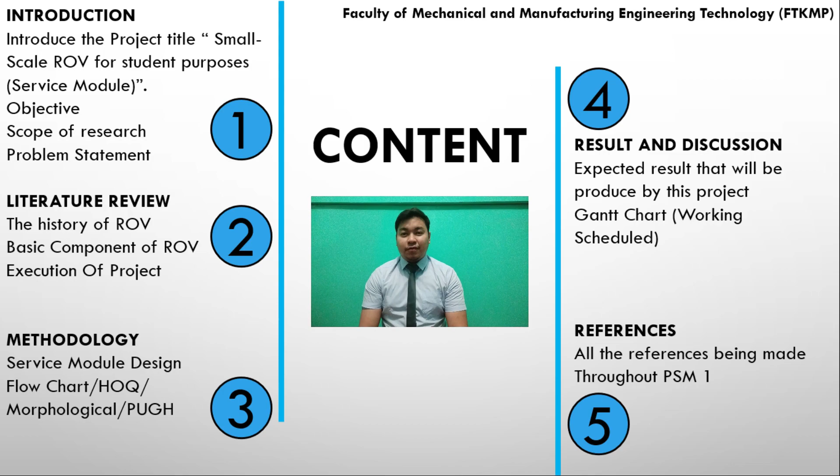For the introductions, ROV has been used and has increased in use following its usefulness in getting jobs done. Many of the vehicles are used for underwater activities in many different companies such as oil and gas, installation, structure, pipeline, and surveillance of the underwater surroundings. Remotely operated vehicles are known as ROV, which are operated by a crew either aboard a floating vessel or on proximate land. These vehicles are used for research observation of underwater activities.

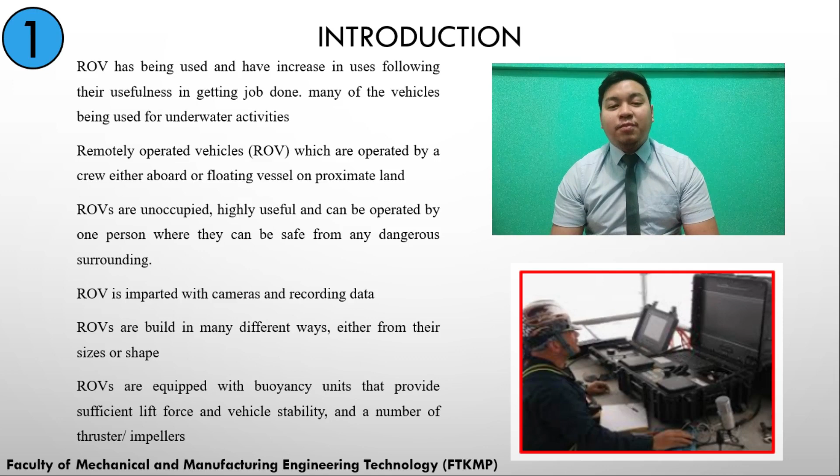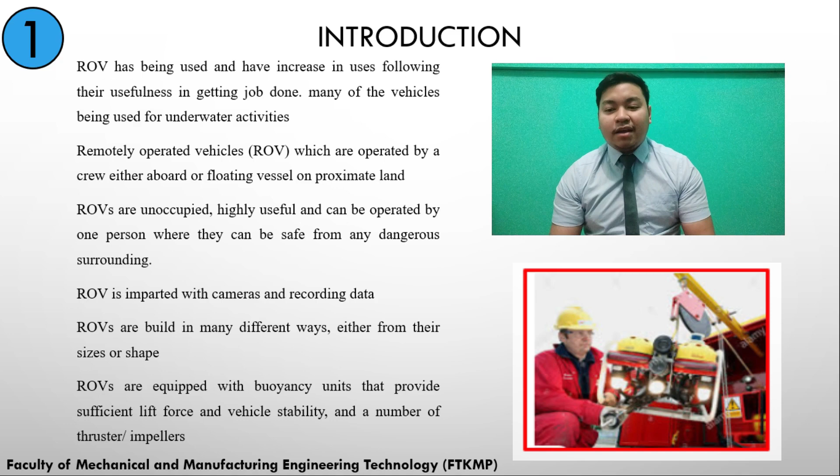ROVs are unoccupied, highly useful, and can be operated by one person, where they can be safe from any dangerous surroundings. ROV is imparted with cameras and recording data. ROVs are built in many different ways, either in size or shape. Their main feature is still to act as a monitoring device to help humans better understand aquatic life. ROVs are equipped with buoyancy units that provide sufficient lift force and vehicle stability, and a number of thrusters or impellers provide manipulation of movement of the whole unit.

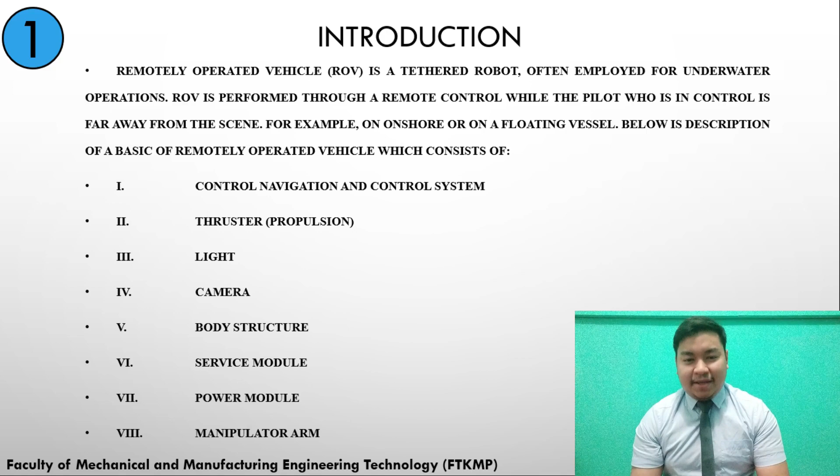Introductions. Remotely operated vehicle, ROV, is a tethered robot often employed for underwater operation. ROV is operated through a remote control while the pilot in control is far away from the scene, for example, onshore or on floating vessels. Below is the description of our basic remotely operated vehicle, which consists of control, navigation and control system, thruster, light, camera, body structure, service module, power module, and manipulator arm.

So the objective of this project is to design and develop a small-scale ROV for educational purposes. Number 2 is to fabricate a watertight body structure for the ROV to store electronic components. Number 3 is to test the small-scale ROV creation.

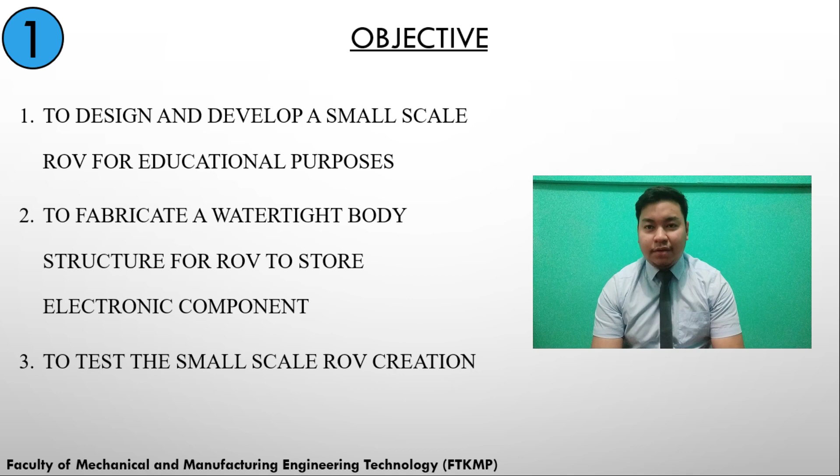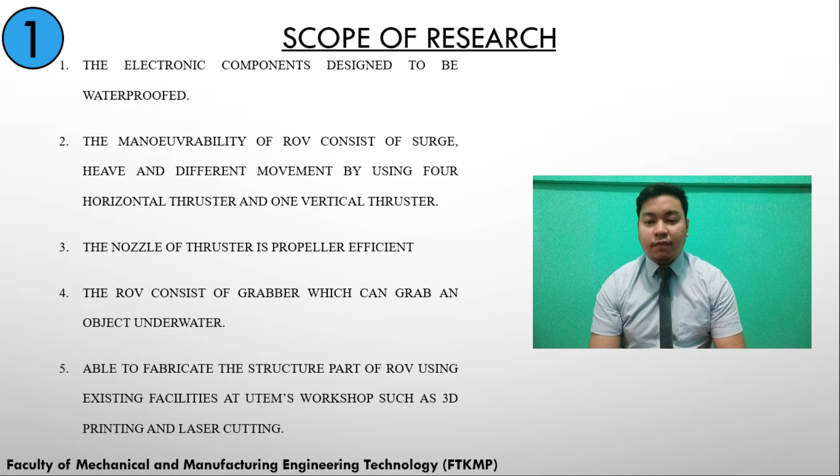Now for the scope of research, the electronic components are designed to be waterproof. The maneuverability of the ROV consists of surge, heave, and different movements by using 4 horizontal thrusters and 1 vertical thruster. Number 3 is the nozzle of the thruster is propeller efficient. Number 4 is it consists of a grabber, which can grab an object underwater. Number 5 is being able to fabricate the structure part of the ROV using existing facilities at UTeM workshops such as 3D printing and laser cutting.

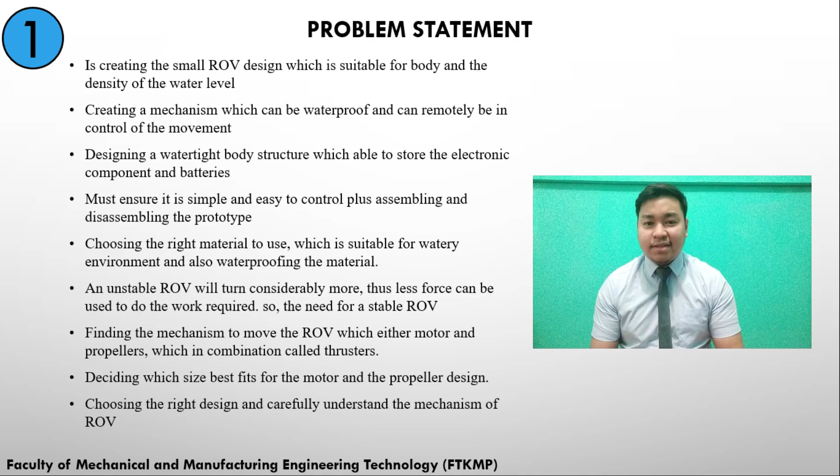Finding the mechanism to move the ROV, either motor or propellers, which in combination are called a thruster, deciding which size best fits for the motor and the propeller design, and choosing the right design and carefully understanding the mechanism of the ROV. For the literature review, the history: the first full ROV was made by Dimitri Rebikoff in 1953.

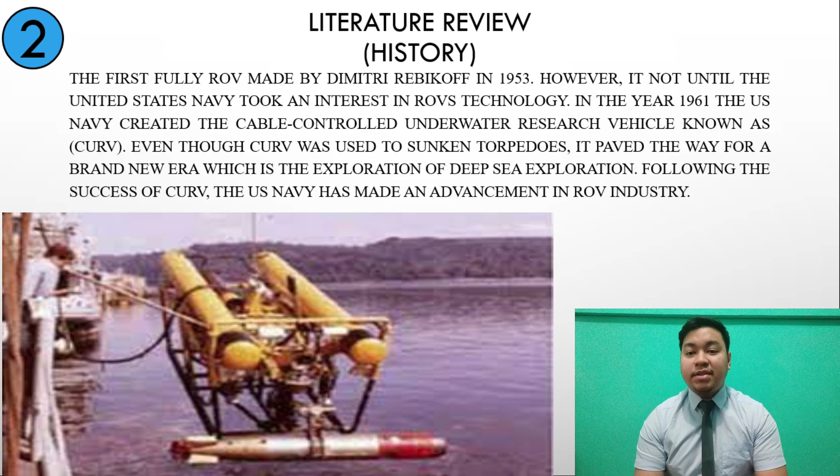However, it was not until the United States Navy took an interest in ROV technology in the year 1961. The US Navy created the cable-controlled underwater research vehicle known as CURV. Even though CURV was used for sunken torpedoes, it paved the way for something brand new, which is the implementation of deep sea exploration. Following the success of CURV, the US Navy made an advancement in the ROV industry.

ROVs are mobile robots designed for underwater working environments, coming in different sizes from small to large, and each used for the environment it observes. An ROV is a camera mounted in a waterproof enclosure, using thrusters to move around, attached to a tether, or as termed, cables to the surface, which is used to transmit data to the pilot to record the findings, either taking photos or taking video of the water environment.

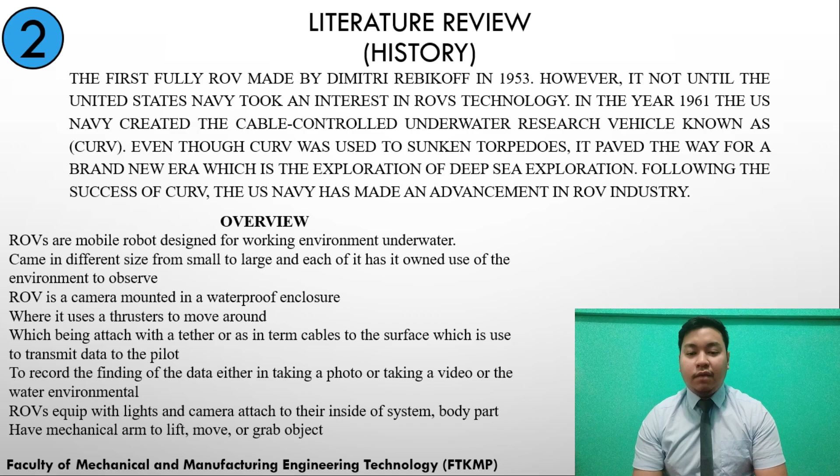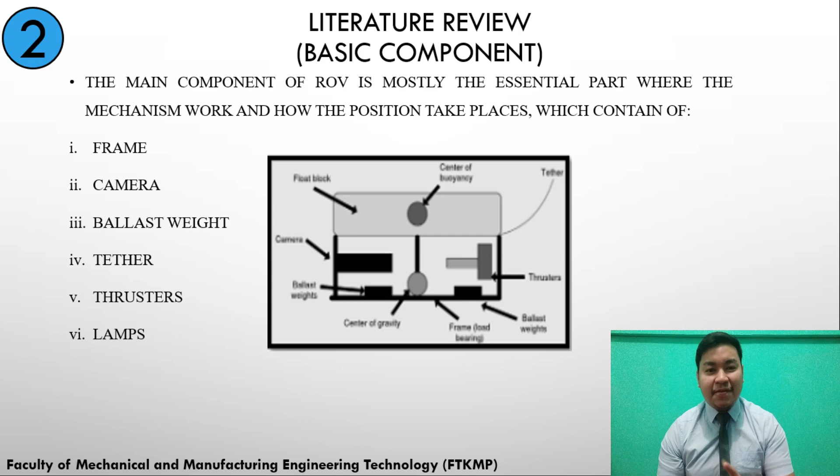ROVs are equipped with lights and cameras attached to their system body parts and have a mechanical arm to lift or grab objects. Literature review: basic components. The main components of the ROV are the essential parts where the mechanism works and the positioning takes place, which consist of the frame, camera, ballast weight, tether, thruster, and lamps. So this is the basic component for the ROV, which is the frame.

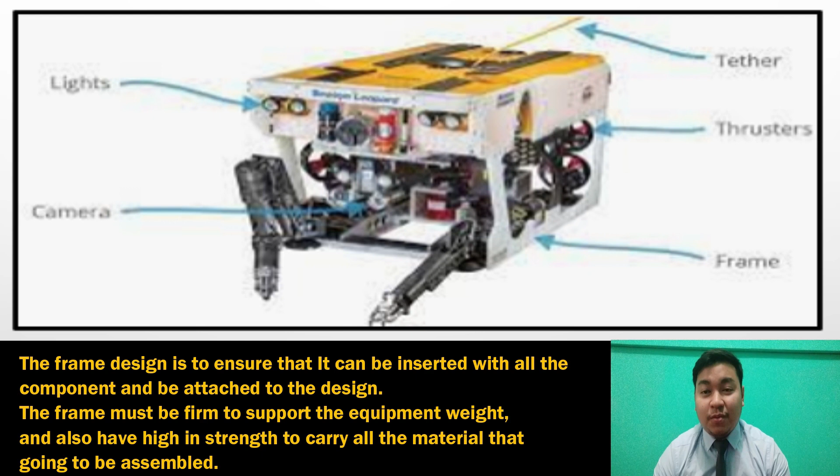The frame is designed to ensure that all the components can be inserted and attached to the design. The frame must be firm to support the equipment weight and also have high strength to carry all the materials that are going to be assembled. For the second component, the camera will function to monitor the surroundings. In addition, the camera can be used as memory data that can record and report back what has been seen

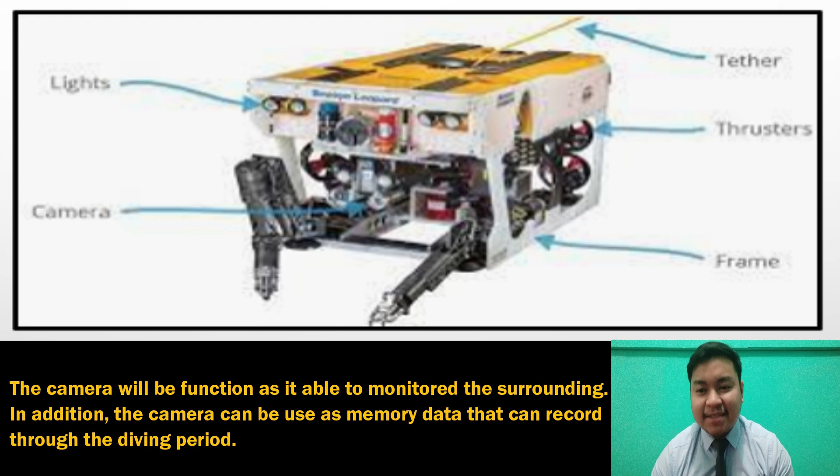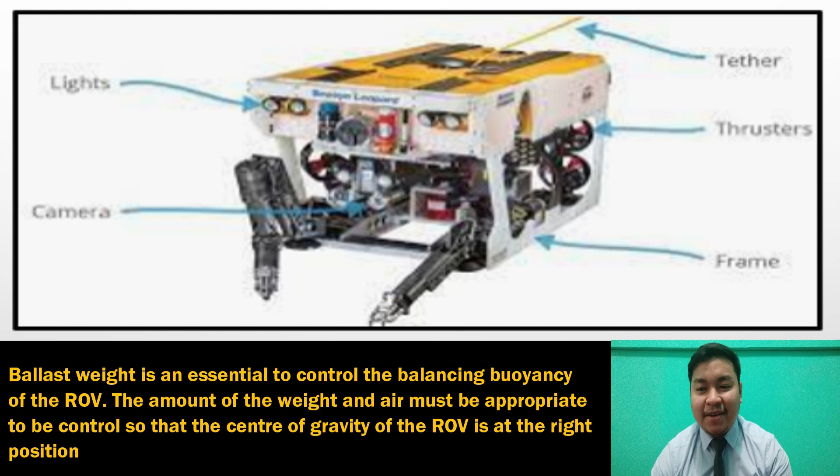throughout the diving period. The ballast weight is essential to control the balance of buoyancy of the ROV. The amount of weight and air must be appropriately controlled so that the center of gravity of the ROV is at the right position and doesn't cause any turbulence when in the diving state. The tether functions as a medium that carries instructed movements done by the controller at the water surface, or the pilot who is in charge of controlling the ROV.

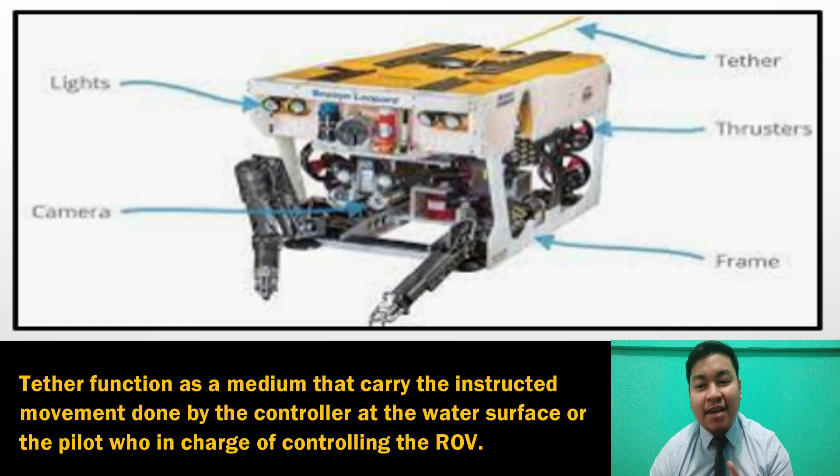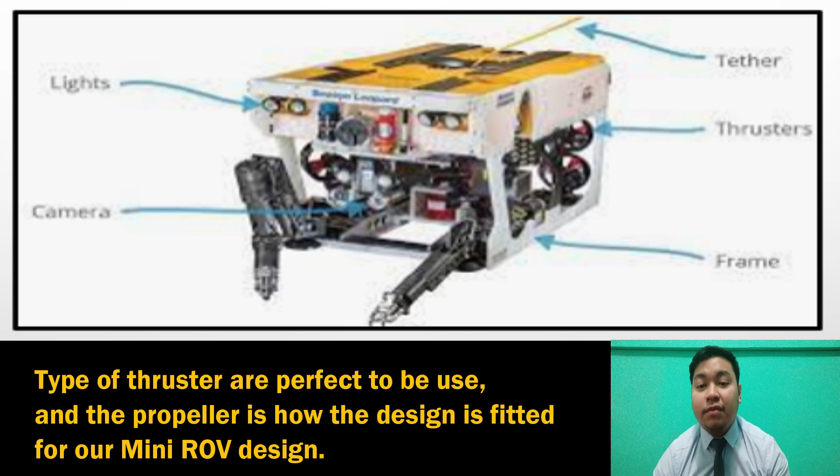In the electrical system, signal transmission is one of two categories, which are parallel and serial data flow. Another element to be taken into consideration is what type of thruster is perfect to be used, and the propeller, and how it is designed and fitted for our mini ROV design. All of these details need to be taken into consideration, following all the materials used, which will change and set upon the details of the vehicle when inserted into watery surroundings.

Literature review: power transmission. The power transmission is usually obtained from the power source requirement by which the ROV is driven. Moreover, the most important thing is to start from the end of the power source and work backwards towards the size of the ROV power source. Preceding that, it is important to have the power supply for working the ROV mechanism. It is also important to mention there is sufficient power for each individual component.

The power source. The type of voltage in the system is based on the components that need to be installed on the vehicle. DC power is mostly used in ROV systems due to the weight of the vehicle. The electrical components on board, lights, camera, and sensors are generally powered using direct current. Meanwhile, alternating current power is used on large ROVs due to its longer transmission range, as AC is able to provide the amount of power needed to support the performance components.

Vehicle control for the power system. The control system of the vehicle is the most essential part, commonly used to manage the various functions of the ROV system, including thrusters, sensors, lights, and more. The basic function of the control system is to change and transmit the operator input into commands that will be imitated as actions of the vehicle.

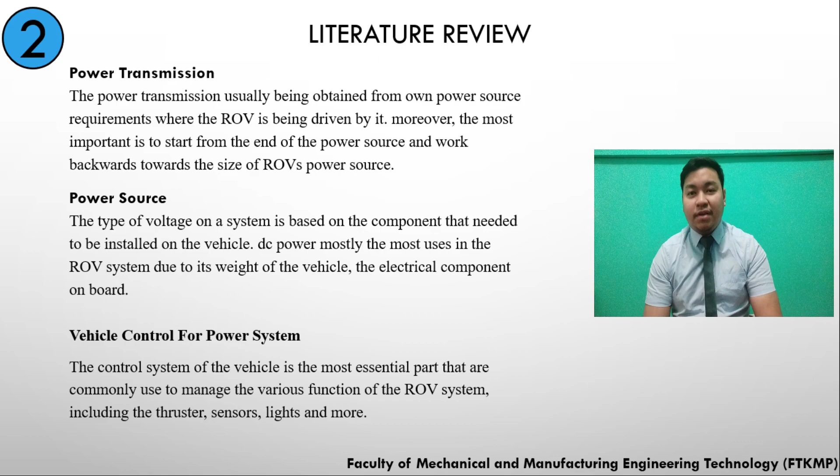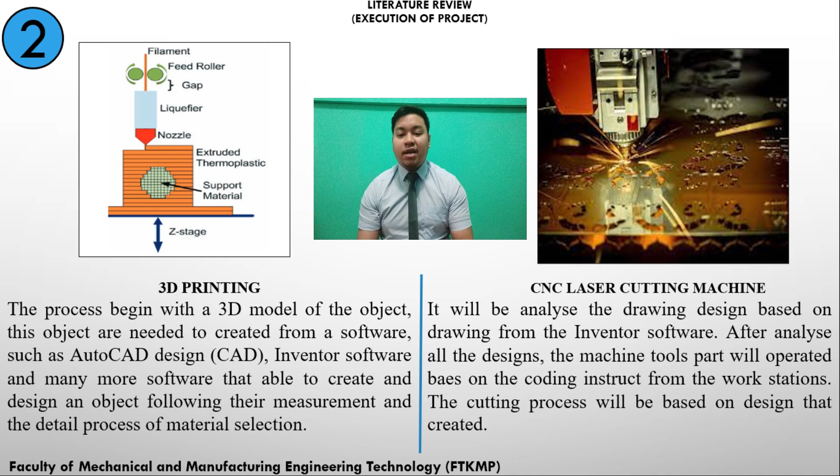Two, the execution of this project, which is the 3D printing. The process begins with a 3D model of the object. These objects need to be created from software such as AutoCAD design (CAD), Inventor, and many more that are able to create designs and objects following the measurements and the detailed process of material selection. And the second one will be the CNC laser cutting machine. It will analyze the drawing design from the Inventor software. After analyzing the design, the machine tool will operate based on the coding instructions from the workstation. The cutting process will be based on the design created.

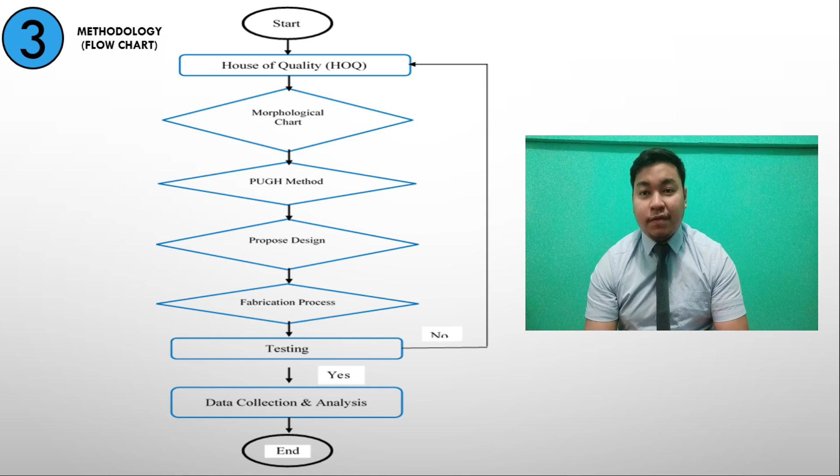This is the methodology, or the flow chart. We're going to start with the house of quality, HOQ, then go to the morphological chart, then to the Pugh method, then the proposed design, the fabrication process, and testing. If it doesn't work out, we're going back to the house of quality, morphological chart, Pugh method, proposed design, fabrication process, and then testing. And if it does work out, we'll proceed to data collection and analysis, and it will be done.

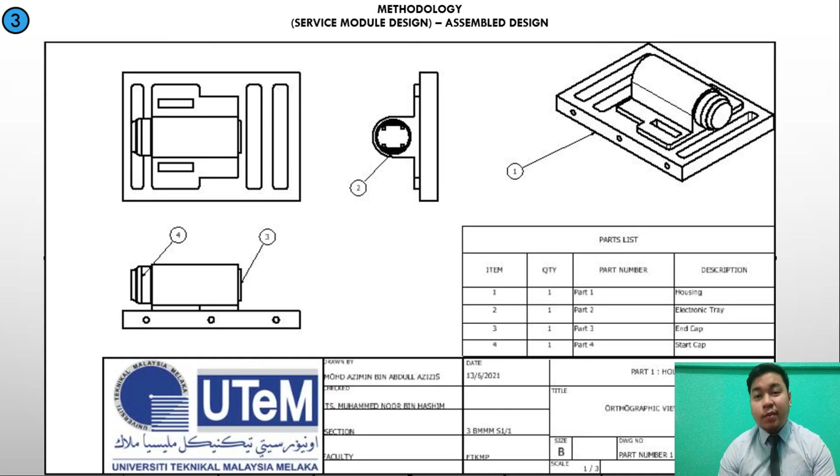This is the assembled design for the service module design. We have four parts: the housing, the electronic tray, the end cap, and the start cap. So from the assembled design, we have the housing. The housing consists of the part where the components are kept intact, and the outer service module region. This part is the most important, where it combines all the components and is the center place of the main source, or the force or energy used.

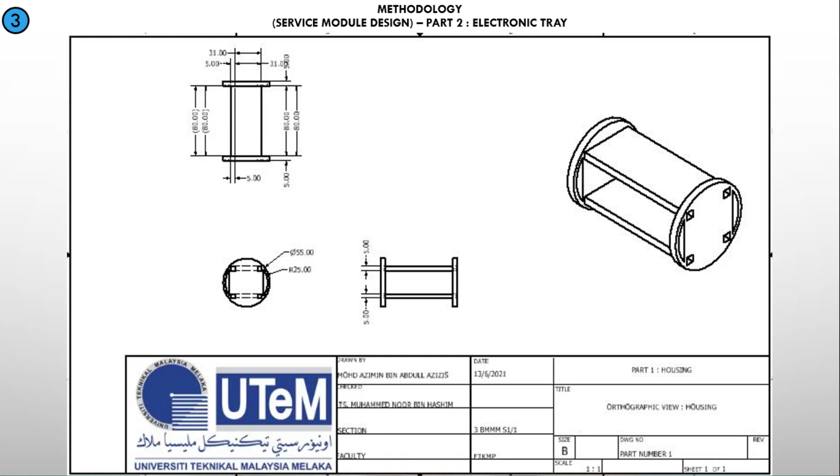Electronic tray: this part of the component is important to its functionality, where the electronic components such as wires are kept intact in the service module. The electronic tray is where the electronics will be inserted while being protected from the environment, such as water and the vibration it will take in during the process of testing the ROV itself.

The end cap. The end cap is the sealing part of the component, where it protects the electronic tray from moving and dropping out of the housing. It consists of a thread on the end of the cap to seal up the housing from the back of the housing.

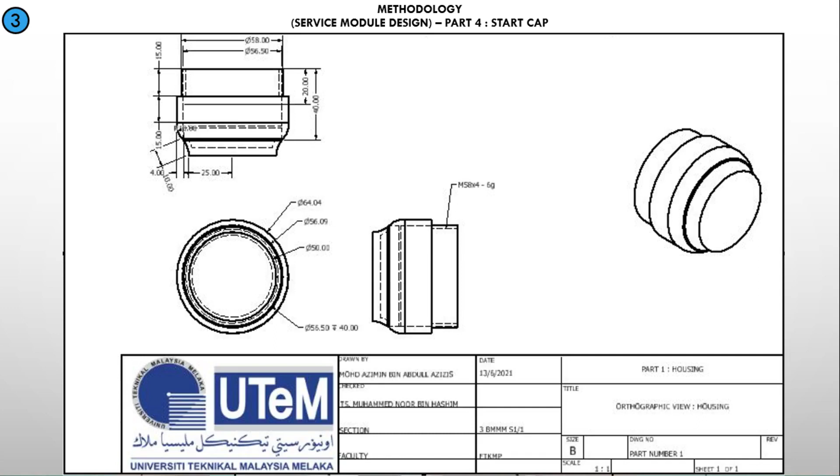The start cap. This part of the component is essential for rear view, where it is the placement of the camera and the lenses to be able to see what the camera is seeing in the water region. This part is essential as it also acts as a seal for the electronic tray, protecting it from getting wet and causing it to malfunction. This is the 3D view design that has been assembled together for the service module.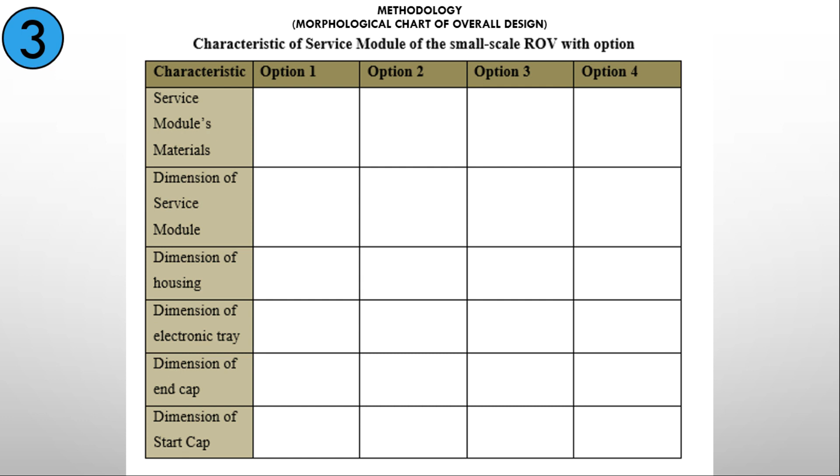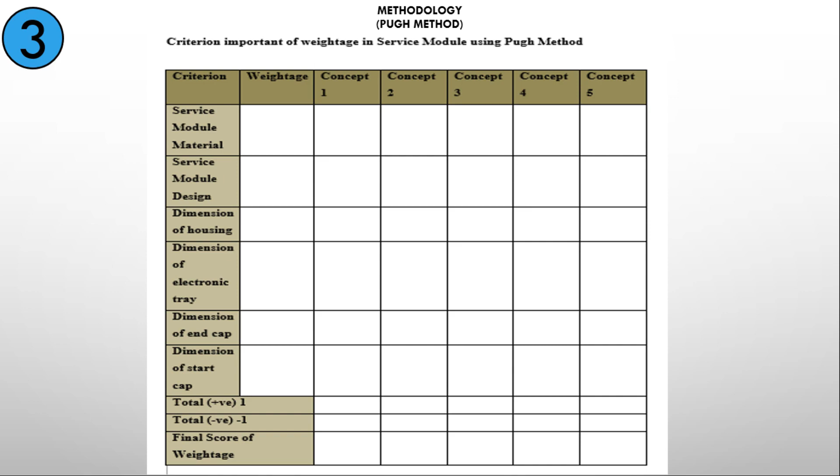This is the criterion importance weightage in the service module using the Pugh method. The criteria are service module material, service module design, dimension of housing, dimension of electronic tray, dimension of end cap, and dimension of start cap. We have the total positive, total negative, then the final score of the weightage.

For the expected results, the prototype of the mini ROV is expected to float due to the material chosen, nylon, which is compact and light given its properties. Number 2, the ROV will be able to be assembled from its individual parts, with the data transferred to the laser cutting or 3D printing machine to extract the size and dimensions of the prototype mini ROV, so it can be assembled freely. We can also insert all the electrical and mechanical components into the prototype mini ROV.

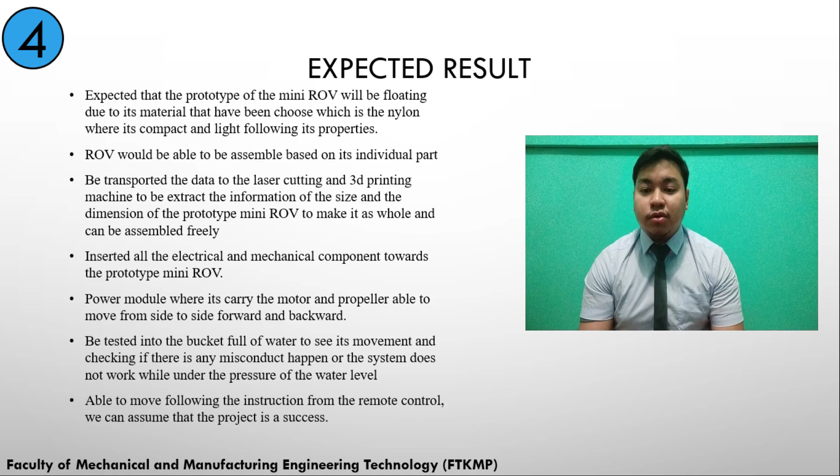The power module carries the motor and propeller, able to move side to side, forward and backwards. It will be tested in a bucket full of water to see its movement and check whether any fault happens or the system does not work under water pressure. If it can move forward following the instructions from the remote control, we can assume the project is a success.

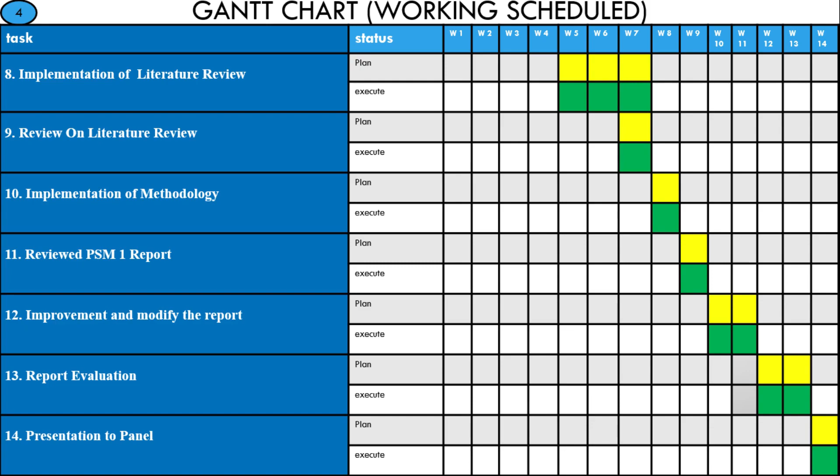Now for the conclusion. In this PSM1, we mainly focused on designing and gathering information to create and fabricate a small-scale ROV later in PSM2. Using the necessary equipment, machines and tools at UTeM, we will be able to fabricate the designated ROV and assemble all the parts assigned by our supervisor, which include the service module, the power module, the body frame, and the manipulator arm. We're hoping the design of each part will fit each other.

Before starting to fabricate them, we will try to assemble all the parts using Inventor 2020 features. When that's done, we'll focus on creating a power source system to apply to the ROV, and then our ROV will be tested in a secure watery region. We hope this project can benefit students, who can learn from our ROV prototype, be inspired by how amazing technology is nowadays, and gain insight into how an ROV works, its basic components, and how to replicate the ROV prototype and what it does.